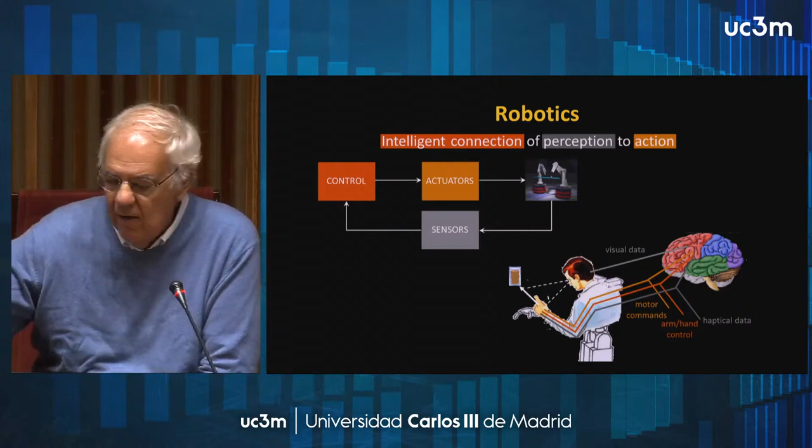But also you have the sensory part, the perception. So I'm thirsty, I want to get this glass of water. So I localize the bottle, then I just move, an action. So there's an actuation and a perception, which is combined through the intelligence, and then I can drink the water, I can feel the bottle of water, if it's plastic or if it's another material. So you have actuators, you have sensors, and then you have control.

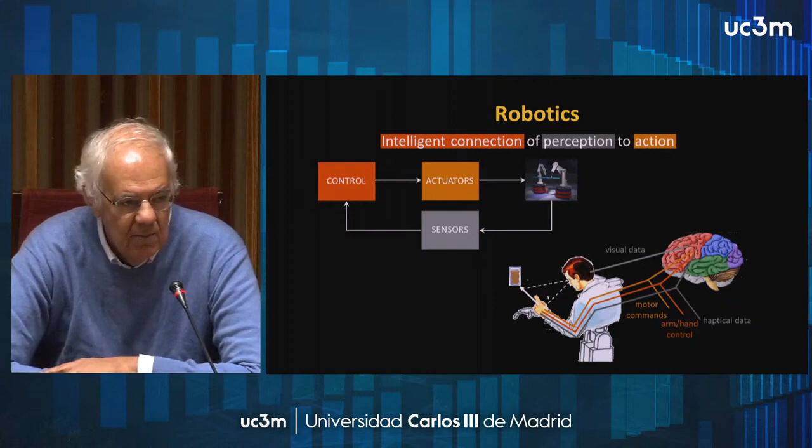So often, I was discussing this morning also with Carlos, if you read any article in the media about AI, just pay attention to the fact that the iconic image of any article published on AI is often a humanoid, a robot. Why is that? Because in AI, we certainly do have the intelligence, which is at the basis of the definition of robotics, the intelligent connection of perception to action.

So if we want to give a broad definition of AI, we can speak about computers mimicking functions and logics of the human mind. So we do have the intelligence, but also we have the sensor, the perception. If you take Alexa, Siri, or during the COVID pandemic, we learned how to do smart working. So we were using intelligence, communication, and also sensory data. Now, this is one first example of cross-contamination between robotics and AI and other fields.

So we have intelligence, and then we have perception, and then we have the weight of each sensor in deciding action, in performing tasks in a more or less intelligent way.

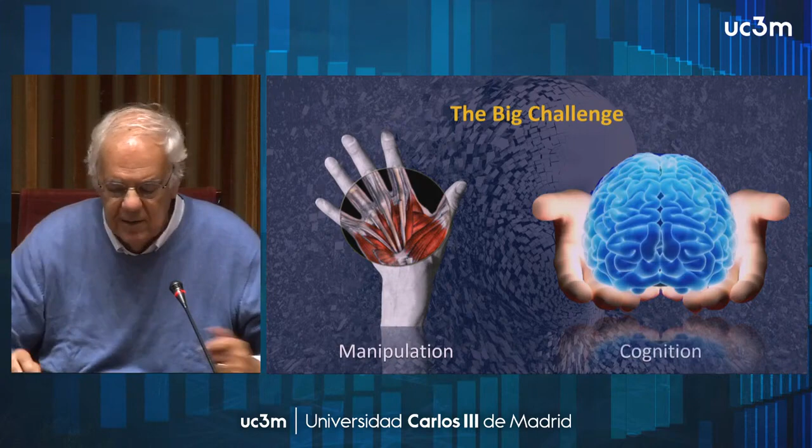And this big challenge between body and mind has deep cultural roots dating back more than 2,000 years, to the time of the Greek philosophers. Aristotle was convinced that the human is a superior creature, and it's the intelligence of the human that allowed the human to interact with the physical world, with the real world. On the other hand, Anaxagoras held the opposite theory. He believed that humans develop their intelligence through the possibility of manipulating, of touching.

Now, take a child in the first months of their life. What do children do? They grasp all the objects and they bring them to the mouth. And the parents get worried because they might eat the smartphone or the credit card or a key or something. Why is that? Because children explore the world according to the concept of the cortical homunculus. They explore the world because they touch. So a 3-month-old child does not have the same level of intelligence as a 2-year-old or 3-year-old child.

So basically, Anaxagoras was right for the children. You interact with the world, you manipulate, you grasp the object, you bring it to the very essence. They bring it to the mouth, but actually they want to bring it to their soul, to their mind. That's the gesture. I discussed this with neuroscientists.

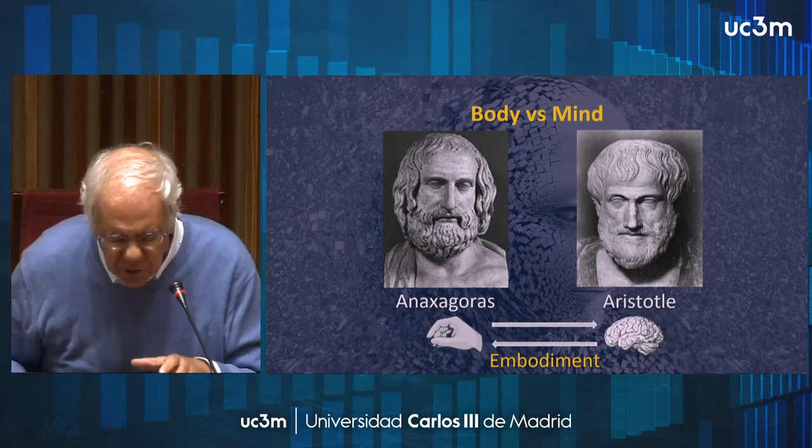So if we capture this sort of dichotomy in a proactive way, we come to the concept of physical AI, of physical artificial intelligence. And rather than wasting time in a sort of cultural battle between the AI experts, the AI purists, who look at us roboticists as one of the N applications of AI, then you should explain to me why, if there is a media article about AI, there is the iconic image of a robot.

And we, the roboticists, we look at AI as one of the enabling technologies. So other than just quarreling between the two communities, I think the big challenge is found at the intersection of robotics with AI. And as we learn from Moravec's paradox, implementing some physical AI algorithm is much, much harder than Alexa, Siri, ChatGPT, whatever sort of AI algorithm we may wish to use. And the deterministic use, the blind use of AI is very dangerous and can have some physical consequences which concern the safety, the legal, and the moral duties of those that utilize the technology.

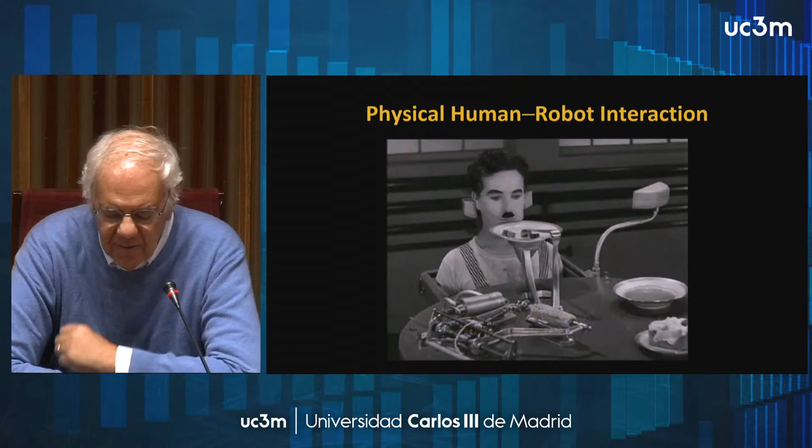So I teach a course about robot interaction control, and usually in my first class in this course, I show this movie. This is almost a century ago, 1936, Modern Times, Charlie Chaplin. The poor Charlot is alienated to be fed during his lunch break out of an 8-hour working shift, like 4 hours, lunch break, 4 hours. And the engineers developed this feeding machine, and it's the human who has to comply with the machine, with the spatial temporal sequence of the various dishes to be fed.

It's the rigid sequence again, so he desperately tries to comply. So what is the message? Often in cinematography, we've had precursors of technology to be developed 20, 30 years later. So do we really want a fully autonomous machine?

So we developed this concept together with a colleague and dear friend, Antonio Bicchi from University of Pisa, the current president of the Italian Institute of Robotics and Intelligent Machines. We wrote a comment in Nature Italy, and we introduced a new field, a new discipline across robotics and AI that we call interaction technology. So this is the natural trend. We come from 2 or 3 decades of ICT, or if you wish, IT, information technology, in which we have the intelligence, we have the perception, but there is not the physical action.

So the acronym is intentionally made out of 3 letters, IAT, not only to disambiguate from information technology, but also to stress the importance of the physical action. For instance, I just mentioned the Department of Excellence project in our department. The winning project, the one which was awarded by the minister, is a project about IAT, interaction technology. I know that you've been very active in Industry 4.0. You have a master, if I'm not mistaken, so I don't need to explain the concept of Industry 4.0 and the concept of cyber-physical system.

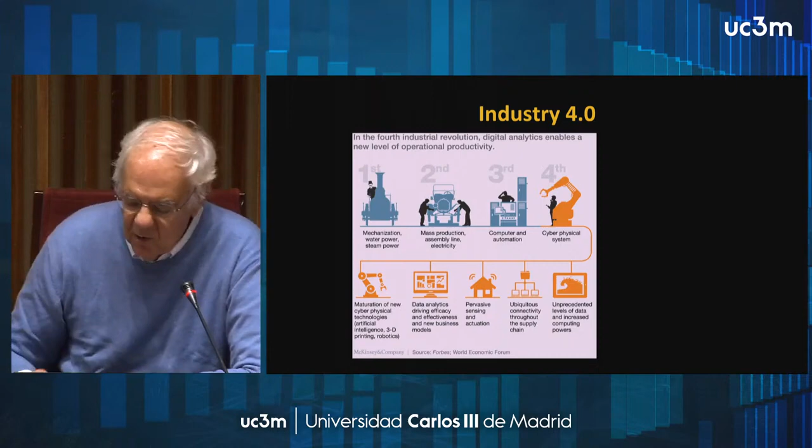I just want to recall what is considered to be the icon of Industry 4.0, which is the cobot. It's human-robot cooperation. It's a robot which is intentionally designed and controlled in such a way to safely interact and share the same workspace with the human. So this is an old video. Probably some of you know this video already.

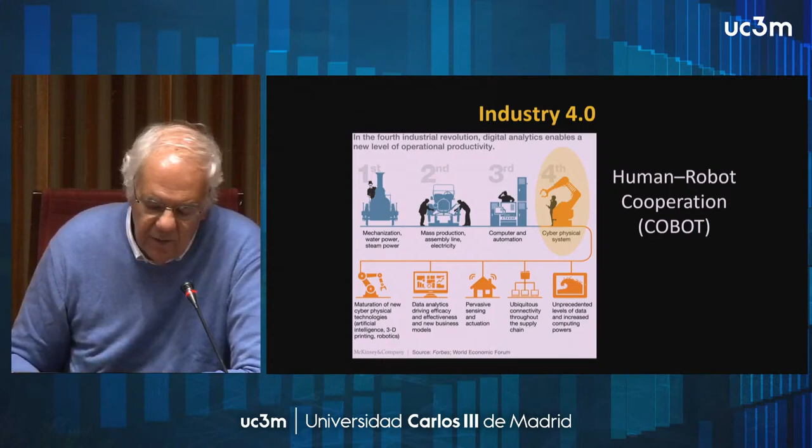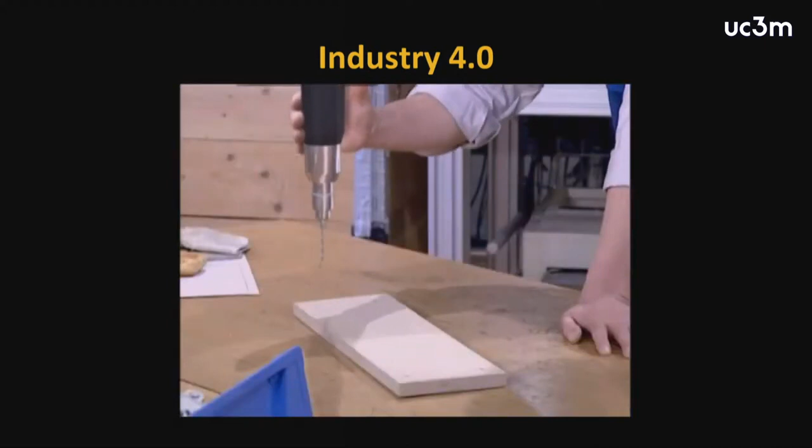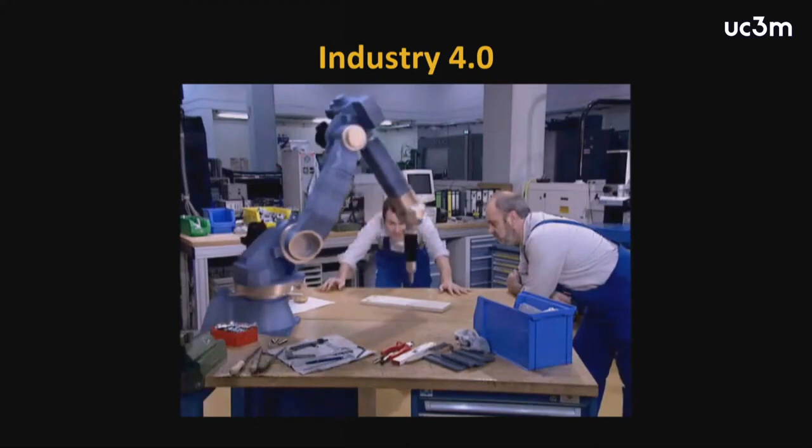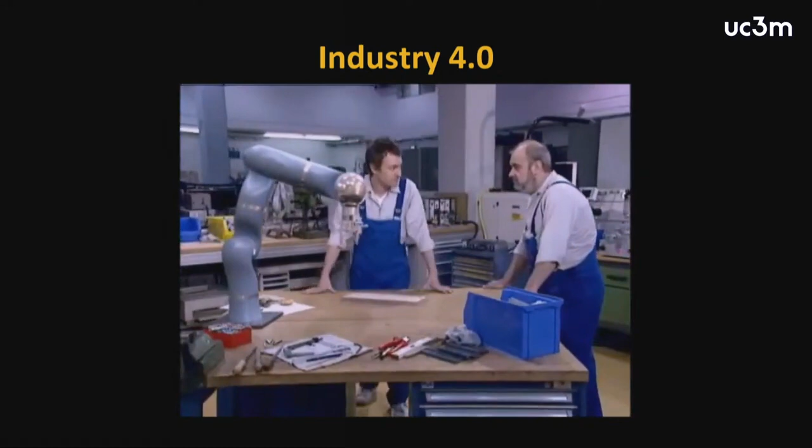We could just show the robot what it's supposed to do. Listen, imagine this is our workpiece, and this is our robot. Okay. It's insensitive, it's deaf, dumb, and blind. Yes, but it moves with great precision. Now, if it's supposed to drill holes here, I just show it the positions, starting here, here, here, and finishing here. The robot remembers the coordinates and repeats the procedure, and that's it. Whoa, that thing is dangerous. It belongs behind a fence. Not if it's equipped with an anti-collision system. And if we give it a soft reaction to touch, besides making it lighter, it wouldn't do any harm even if it did crash into something or someone. Not bad. So you could actually work safely in the same workspace as the robot.

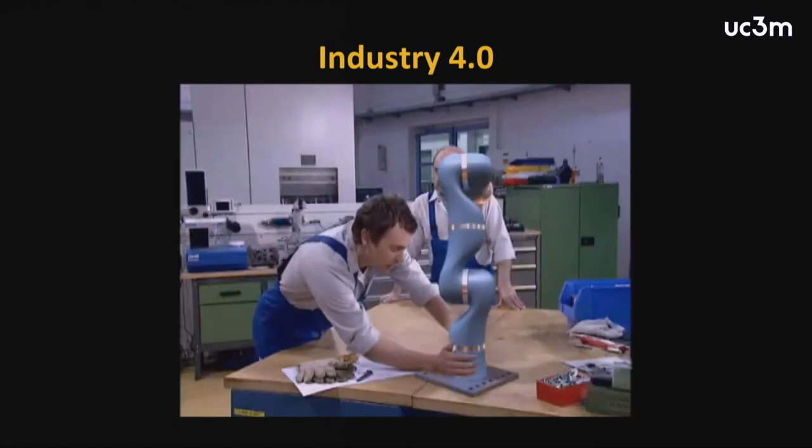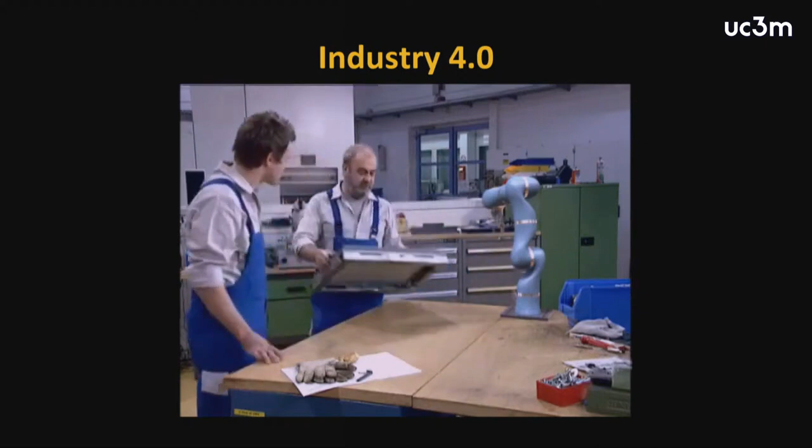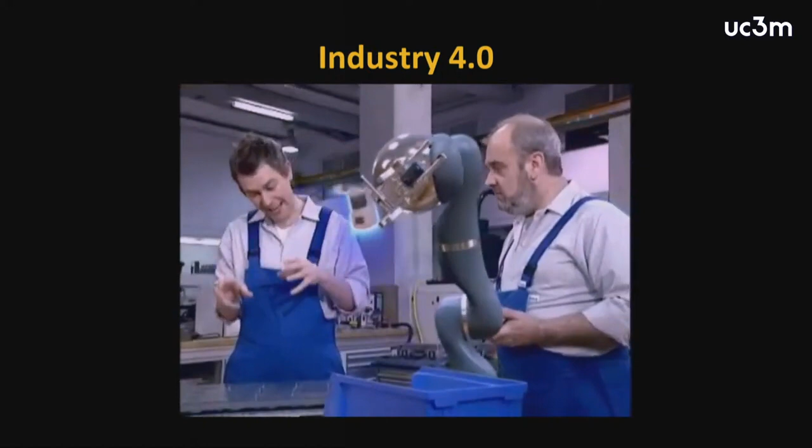Right. And because the robot is now so light, you could easily move it from one location to another. Wow. So you could actually carry it across to the shop floor and train it to load the machines. But wait a second. For detecting complex parts, this isn't precise enough. Well, to simplify the programming, the robot could be equipped with a camera or a 3D sensor so that it could detect the exact positions of the workpieces and choose the best one to grip next. Yes, of course. And then it might even understand spoken orders. Hey, why not? Place pump case in workpiece carrier. Hey.

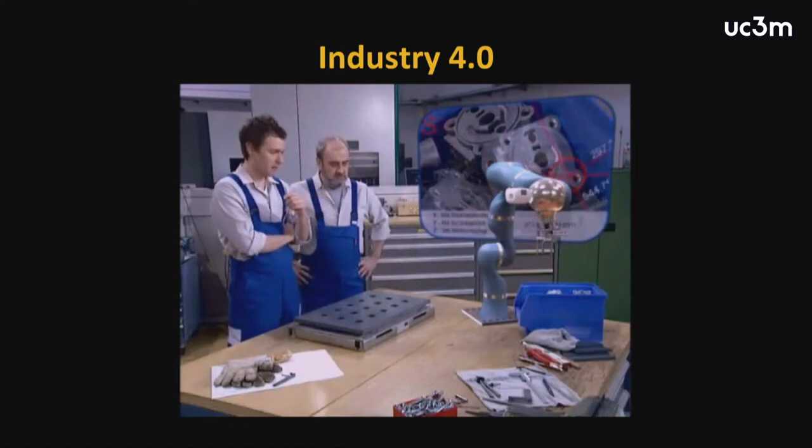So what is the message of this cobot? It is the intuitiveness, the plug and play concept. Well, they are two actors, but they pretend to be two workers in a kind of machine shop, and they develop the application in a sort of teaching by showing way, in a safe way, without writing hundreds or thousands of lines of code. So this is the plus of the cobot.

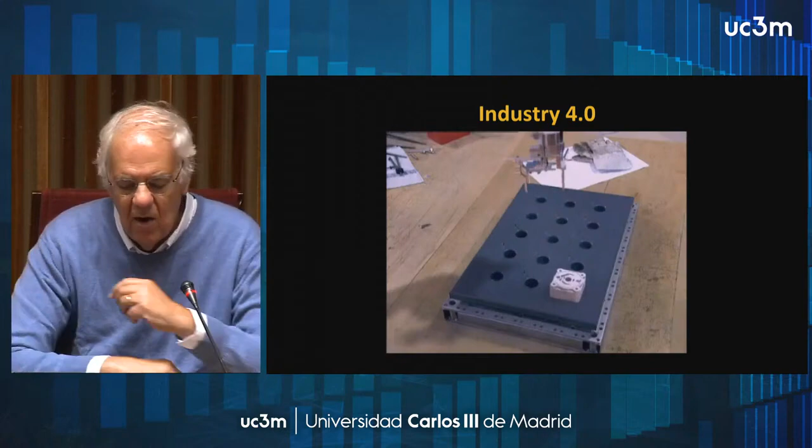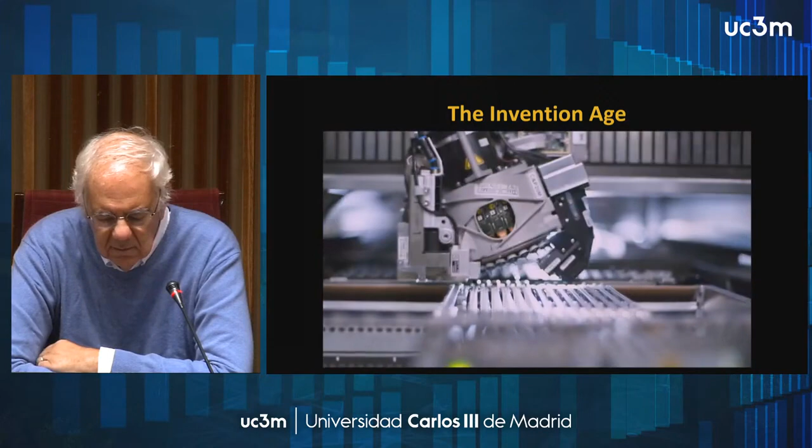This is a time of rapid progress, when precision robotics, advancements in AI, and the capabilities of 5G can accelerate innovation, revolutionize logistics, and enhance our daily lives. When robotics, AI, and 5G work in unison, new possibilities emerge. This is the invention age. It starts with Qualcomm.

So, what is this invention age? The main feature of the invention age, as represented by this video, is the possibility of reproducing the tactile feeling, the tactile perception globally over the network. So, during the pandemic, we learned how to do smart working, but there was not much physical smart working. Manufacturing and production had to be shut down, and we were not able yet to operate machines globally through the network. So we didn't really have physical smart working yet.

So if we want to have a network connecting machines and humans globally for real-time control, and also to be able to reproduce the physical, tactile experience remotely, we need some proper interface, some proper haptic equipment. So what's happening is a sort of transition from the IoT, the Internet of Things, to what we call the Internet of Skills. Skills are much more than things, because it's not only data to be handled and managed in an intelligent way, it's also the possibility of reproducing the human skill, the physical action.

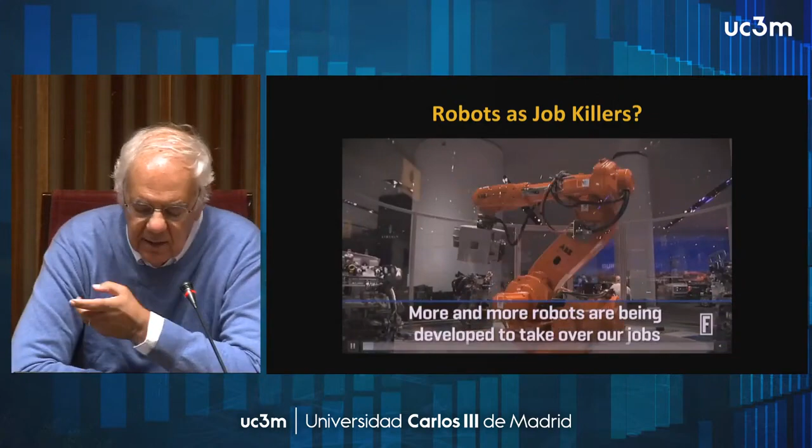So what are the jobs at risk? This video is taken from Fortune Radar. There is no audio, so I'll say a few words about this video. Those jobs which are repetitive, which are boring, which are frustrating, will be replaced by machines.

But there are other jobs in which, other than replacing a human, you will have some sort of robotic technology assisting, aiding the human. This is the case of health. It's also the case, of course, there is a big fuss about autonomous cars. In San Francisco, we have now Uber robocars. I think they've been discontinued for some safety problems to be solved.

So, for instance, for truck drivers, the truck does the lane tracking, and the driver can take a break, can take a coffee, can go to the toilet. And then, of course, you need legally the driver on board because you have to exit from the expressway and you have to drive into the city and so forth.

So, other than thinking of robots as job killers, in the face of some jobs lost, there will be some jobs gained. Amazon made their business 5 times bigger during the pandemic. And there was a report in The Guardian, like a year and a half ago, that Amazon installed 500,000 new robots in their plants, in their logistic lines.

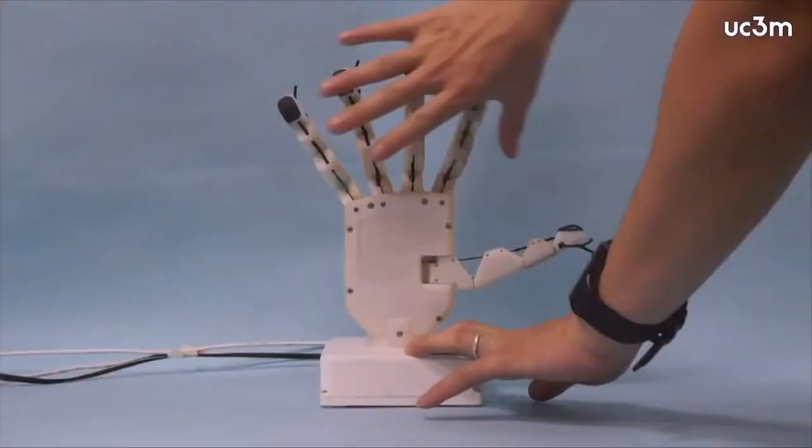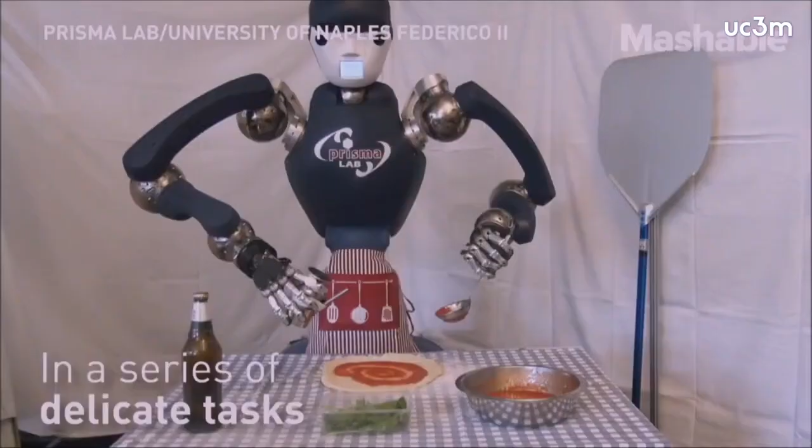We have developed bimanual robots and anthropomorphic hands for dexterous manipulation. Thanks to my ERC Advanced grant, we have expanded the team with complementary skills to work on non-prehensile dynamic manipulation and manipulation of deformable objects. We have designed sensorized grippers for handling tasks of robots in supermarkets and retail stores.

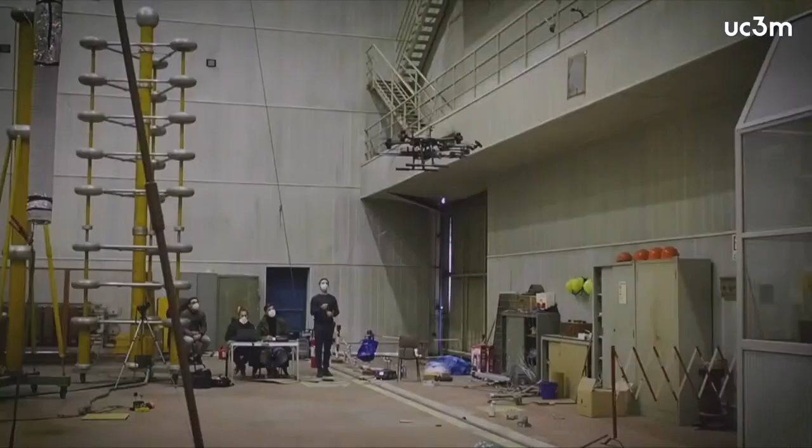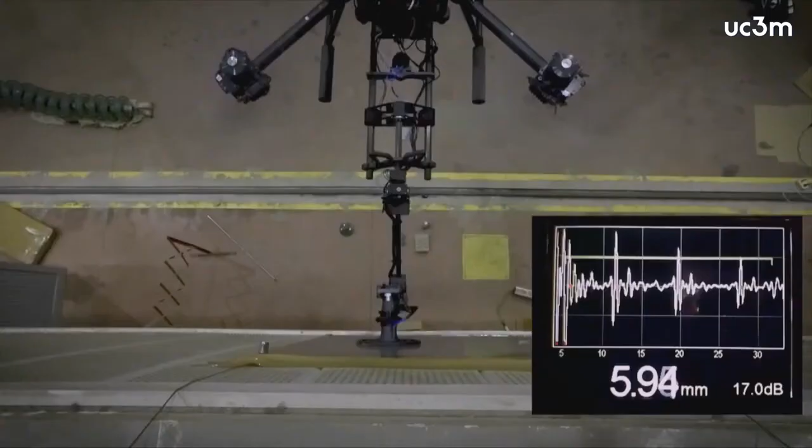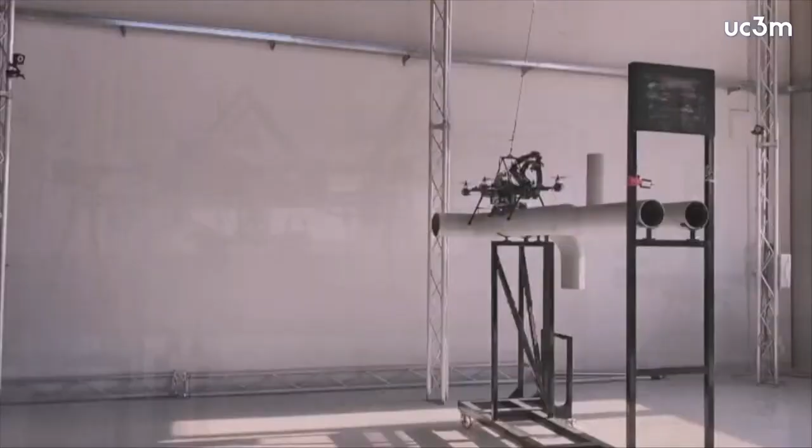Both industrial plants and civil infrastructures constitute hostile environments requiring mobile, marine and aerial robotic technologies. We have developed multicopter drones for non-destructive testing of bridges and viaducts and for aerial cooperative manipulation of payloads. We have designed a hybrid drone which can fly, roll along and inspect pipes, and an aquatic drone for eco-sustainable reuse of offshore platforms. What is the benefit of these technologies? Reduction of costs and risks. The operator can safely guide a remote robot, which then can execute tasks in a semi-autonomous way.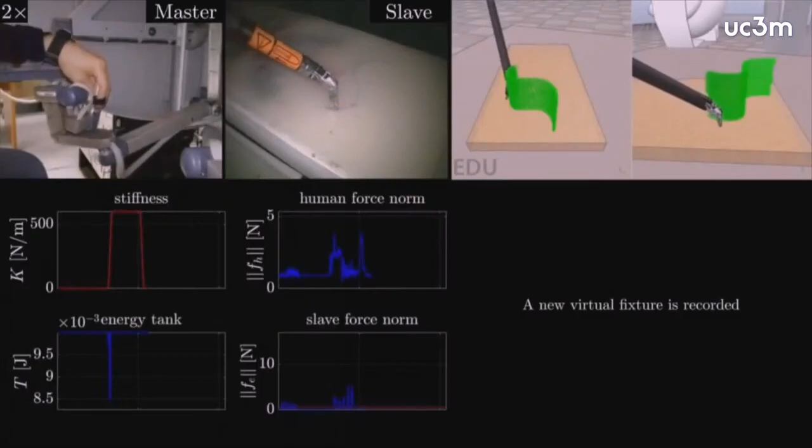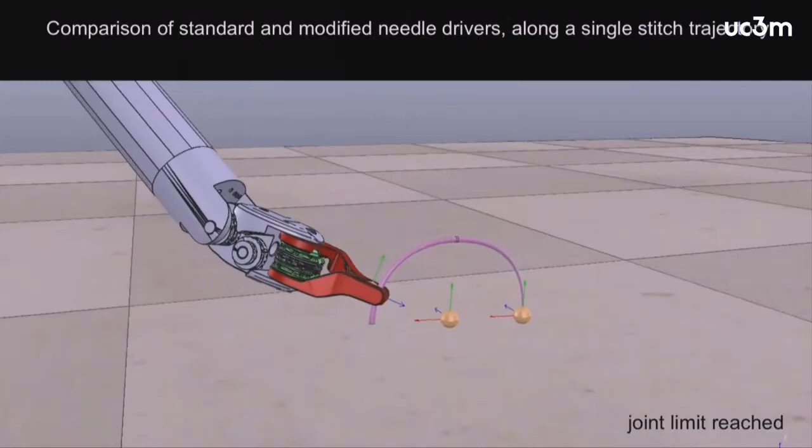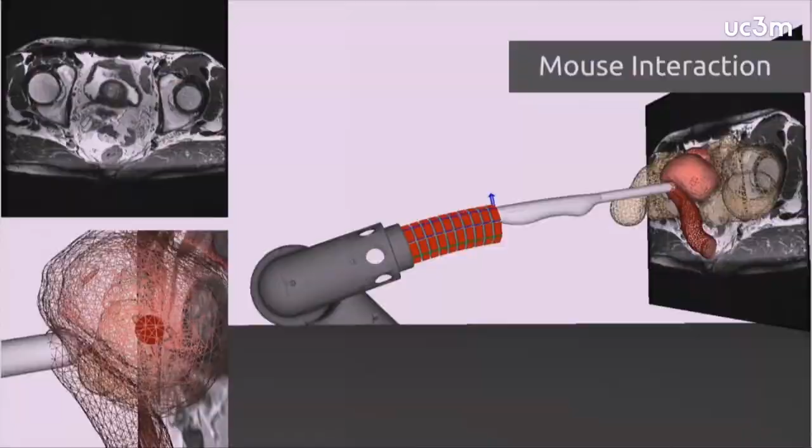In the field of surgical robotics, we have introduced techniques to provide the surgeon with enhanced multisensory perception, including tactile feedback, which is still missing in today's commercial systems. We have designed mini-hands and tools for laparoscopy, prostate biopsy, and suturing. At the frontier of theranostics, we are developing a new version robot with the dual-arm micromanipulator for one-stop diagnosis and treatment of precancer cells during a colonoscopy.

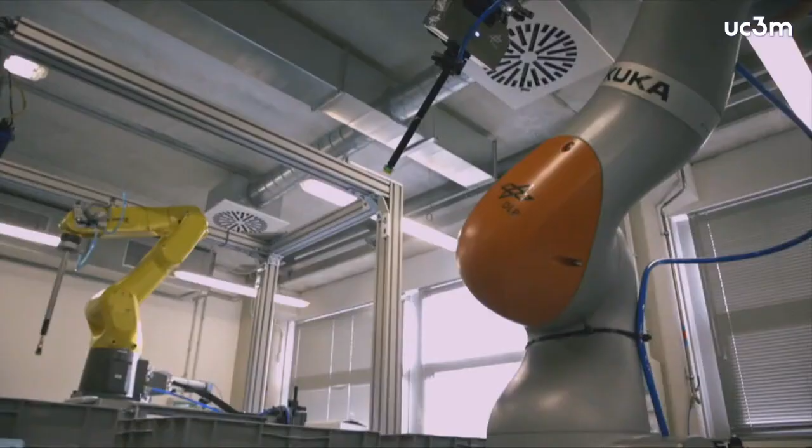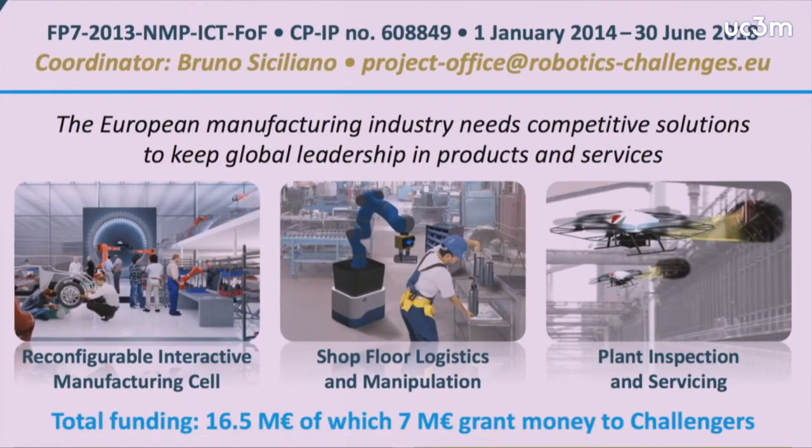We have introduced the instrument of small-scale experiments aimed at turning prototypes into successful products. While strengthening the cooperation between academia and industry in the various experiments, there will be an added value brought by the project. Another instrument we have introduced is that of the challenges through the exploitation of synergies across all the stakeholders to speed up the process of bringing innovative technologies from research labs to industrial end users. We are also active as Digital Innovation Hub in the European robotics scene.

Our research has also had a great impact on education. In the latest few years, at University of Napoli Federico II, we've been observing a constant increase of numbers of master's students graduating in robotics. Thousands of students at universities around the world study robotics from our textbook. The textbook contents are also available in terms of 2 MOOC courses for web learning education.

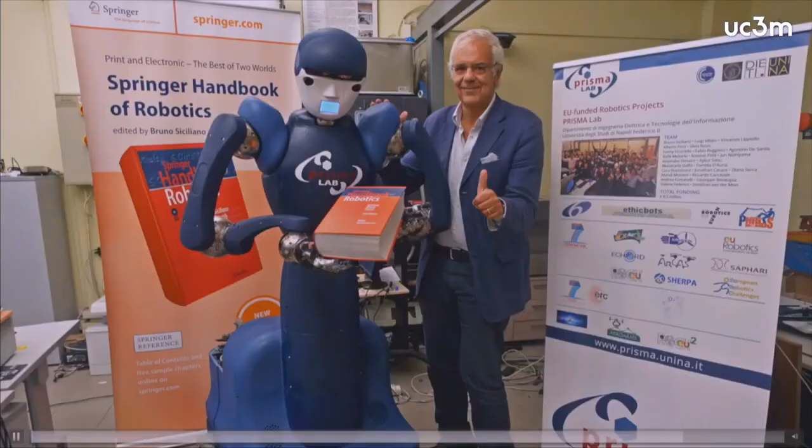Where is robotics going? Reaching for the human frontier, robotics is vigorously engaged into the challenges of new emerging domains. New communities of users and developers with growing connections to robotics are coming together, and thus our strategic goal should be one of outreach and cooperation with these communities. The inherent interdisciplinary nature of robotics is well captured by the Springer Handbook of Robotics. The handbook received the prestigious PROSE award in the category of engineering and technology, and remarkably, it was also the winner for excellence in physical sciences and mathematics, a true consecration of robotics as a science beyond the boundaries of engineering and technology.